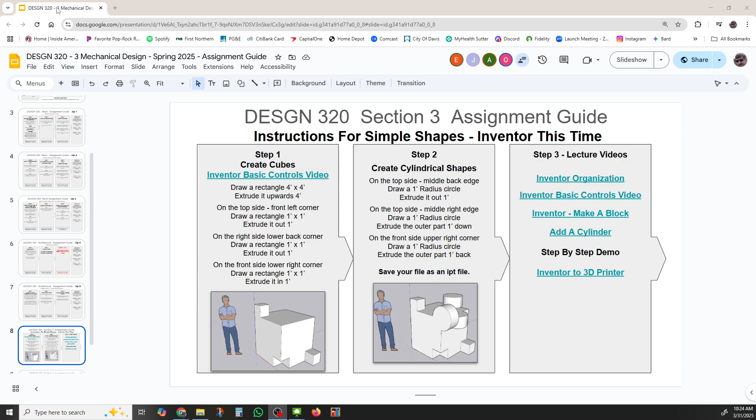Okay, so I'm going to pull that down and out of the way so I can see it and know what to do. And we're going to get going. Remember, we're going to go to a new part, and I've been in it already, so it knows where to go. English US, English, standard part, and I'll create that part.

Okay, and I'm gonna save it right off the bat. File, save, and I'm gonna call this simple shape demo. Simple shape demo. Yours will, you can just call it simple shape with your initials on it.

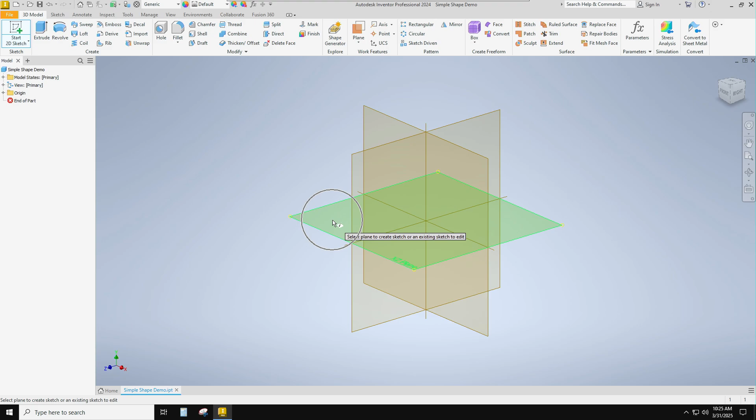Okay, and remember I've got all these things to look at, and I usually like to go to an isometric view when I'm doing solids. So draw a rectangle 4 foot by 4 foot and extrude it upward. So I have to start my 2D sketch. I'm going to put it on the ground, left click, kind of rotate my cube a little bit, and I probably have to zoom out quite a bit.

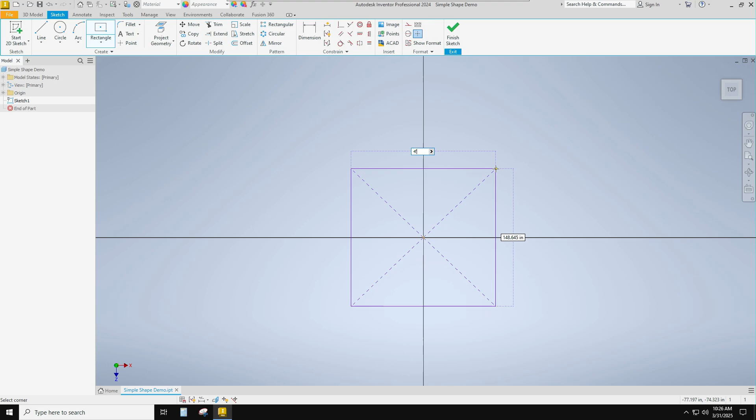Use my little hand there, hit escape, rectangle, find the center, out. And I know that 4 foot, I can type 4 foot with the apostrophe, tab, or 48 inches, 48 inches. Enter. There we go, 4 foot by 4 foot. Remember, green check mark.

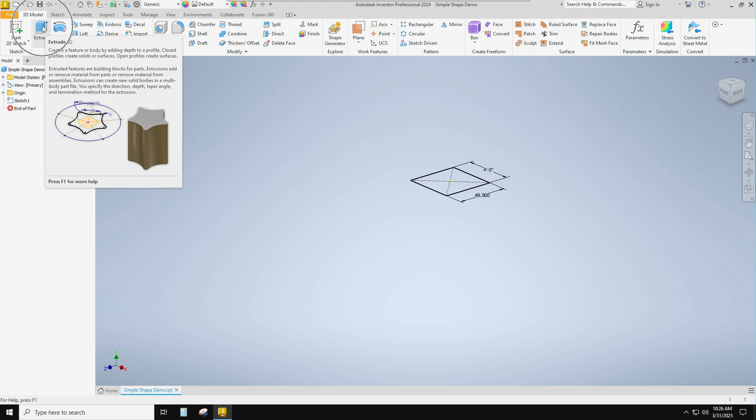Going to scroll out a little bit because I need to extrude that up now. Extrude, left click, find inside of it. Click, and then give it the distance: 48. There we go.

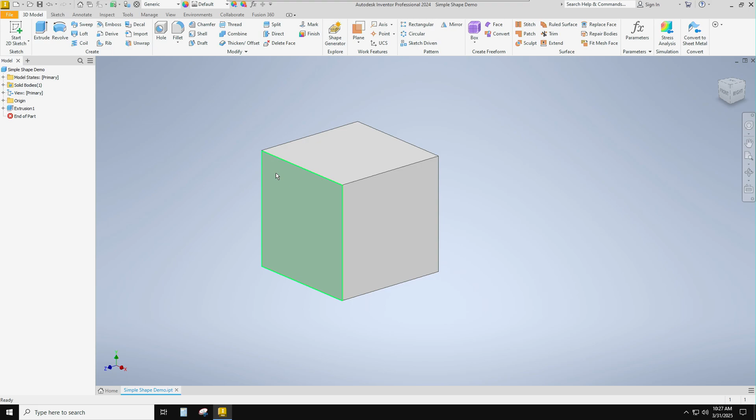I'm going to double click my mouse wheel to zoom extents. Go out a little bit. Okay, on the top side, front left corner, that's going to be right here. Top, front, left corner, 1 foot by 1 foot. So now it's going to go up from here. So I'll start my sketch on this surface, just like SketchUp.

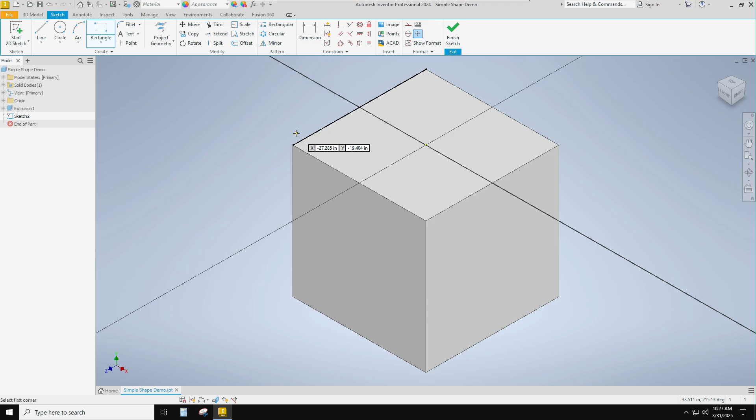And I'm going to get it oriented right. I'm going to go to my front view, get it oriented. It's going to go right there. And this time, of course, I want probably a rectangle that starts in a corner. Click it, turn green, click it, turn green. I'm moving it with my fingers off the mouse, and then click the mouse, left click, let it go, pull it out. My fingers aren't touching it anymore.

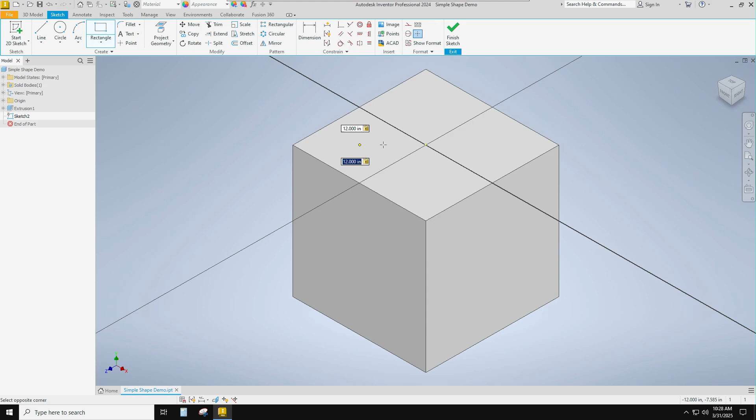And 1 foot, I can type 1 apostrophe for 1 foot, tab, or I can type 12 inches. Okay, so that one's done. Finish the sketch and extrude it upward. This one is 1 foot. Okay, got it.

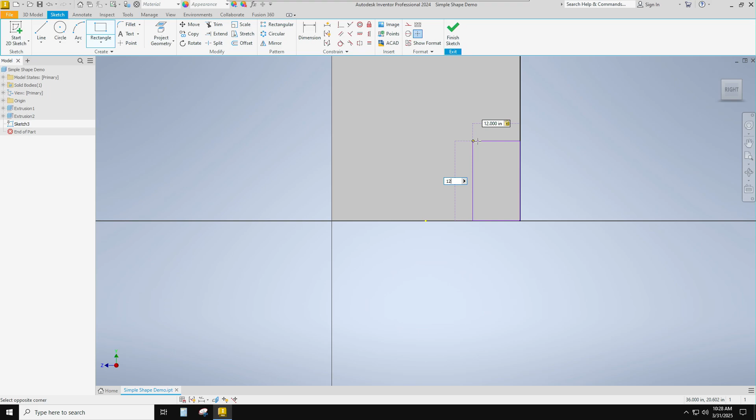Right side lower back corner, it's going to be much the same thing. Start my sketch, left click, find the surface, left click, rectangle, find that corner, it's snapped to it, it's green, left click, 12, tab, 12, enter, finish. Extrude. This is just like SketchUp, 1 foot. And it sort of remembered the last one I did, which is really nice.

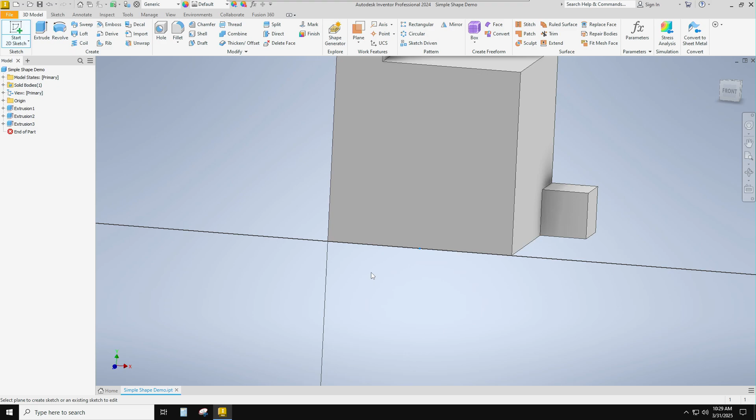And the last one is this front, and I have to push it back this time. So here's my start. Find that front face, make my shape. Again, it's a rectangle, and I can find this corner. It kind of snaps. It's hard to see, but it turns green and kind of pops into place. Left click, 12, tab, 12.

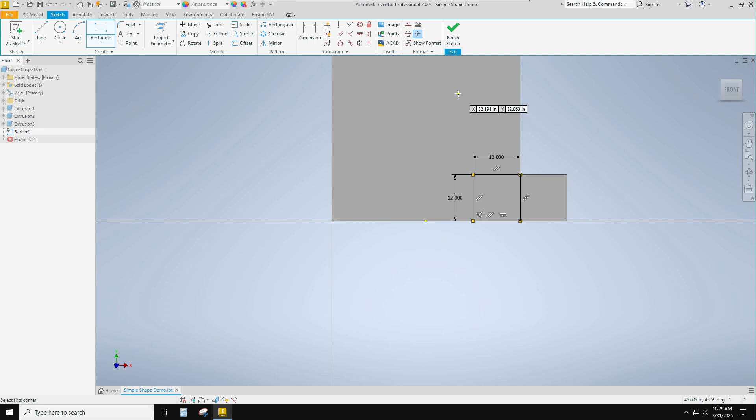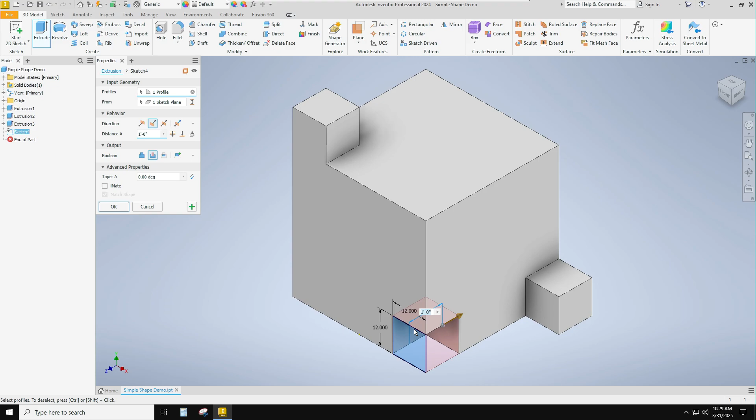12 by 12. Finish. And this one, when I extrude, instead of going outwards, I want it to go inwards. So I have to switch the direction. And it automatically switches to subtract, but I could do all sorts of things with it. Okay, but it's going to subtract my piece.

Okay, so I've just done something good. I better save it. I'm inside. I want to save. Okay, so that's a big cube, a cube on each face, two of them that are positive out, one that is negative in.

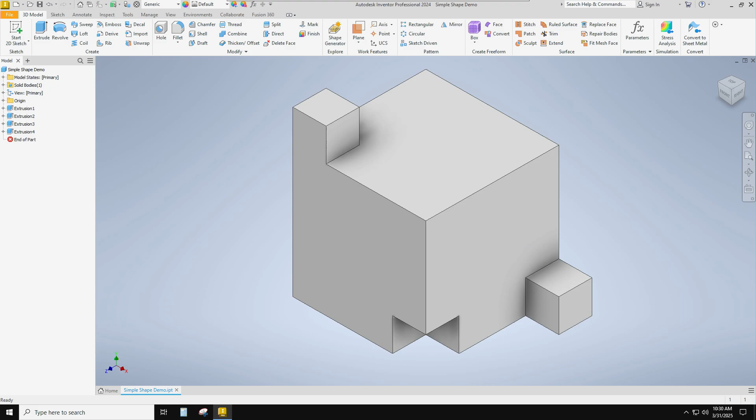So that's step one. Now I'm going to put the cylindrical shapes on it. Top, side, middle, back. Okay, so here we go again. I'm going to start my sketch on the top. This is my middle back. Circle, find, there it is. It found it, it snapped to it.

Bink. Left click. And it's doing the diameter. And this wants a 1-inch radius, 1 foot radius. So my diameter has to be 2 feet. Enter. Cool.

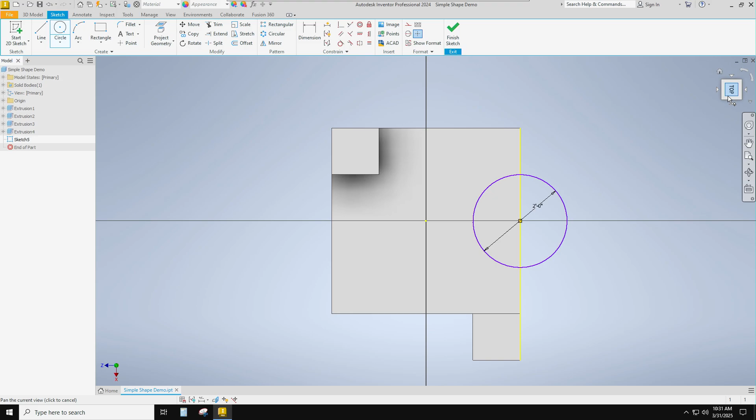Finish my sketch. And now look, this is really cool. I can pick both halves, but I just need this outside half. No, I need both halves. Click, click, and go up 1 foot. So I clicked in each one to go up.

Okay, my next one, top middle edge. And look, every one of these, I can see each one that I've done, and I can adjust them individually if I need to, which is a really cool thing. I can take each of those as sort of like a feature, kind of a solid shape that's put together into each of these. I can adjust each of those separately.

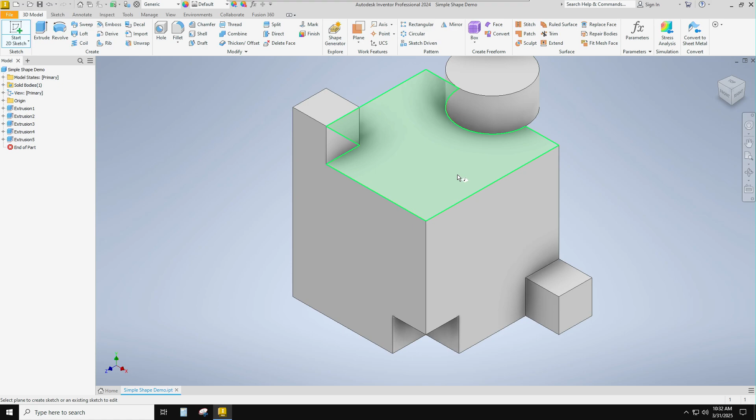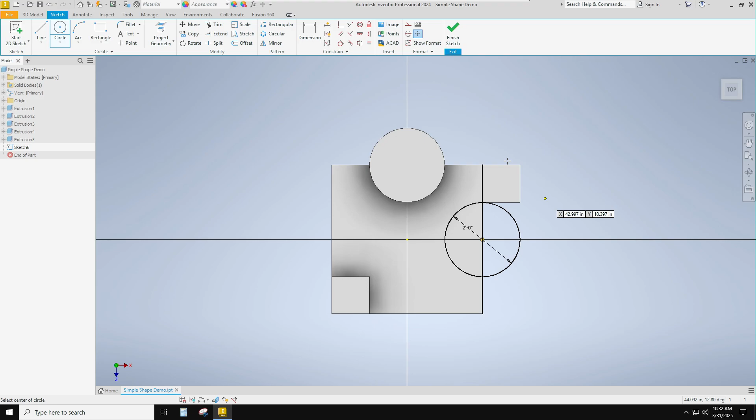But now I'm going to do another one on the top side, middle right. That's right over here. Top, right, middle. Find that midpoint, it snaps to it. And remember, a radius of 1 foot is a diameter of 2 feet. Finish your sketch. Now this time I only need to click this outer part and change the direction.

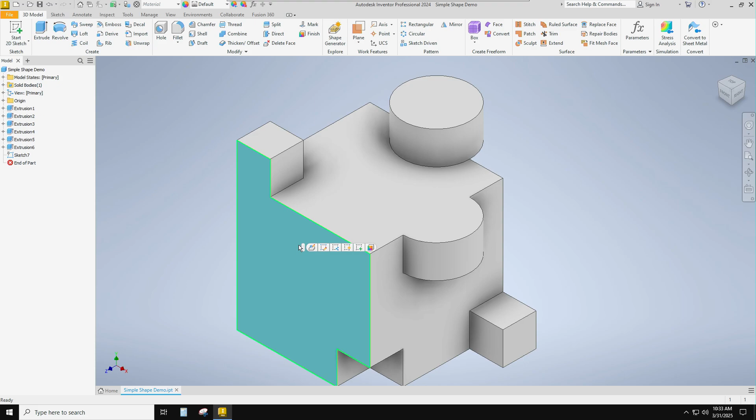Okay, and my last one is on the front. Let's do that one again. Move it down where I can see it. Actually, I think I want to see it from there. And I got to find that middle. There's the middle, right there. 2 feet. Enter.

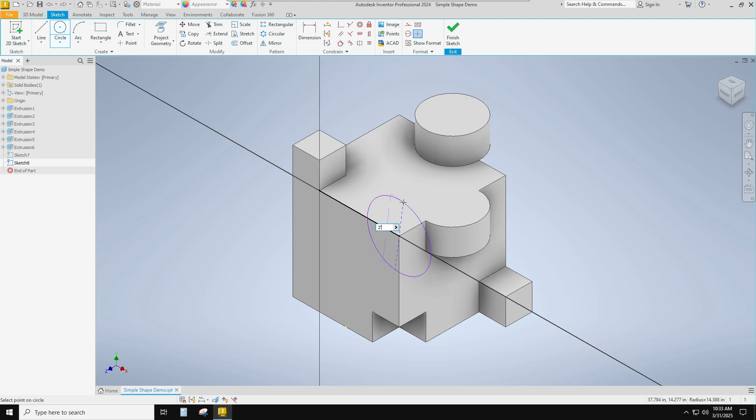And this one, oh no, that's not where it goes. Sorry, it goes on this corner. 2 feet. Enter. OK, and press pull back the other way.

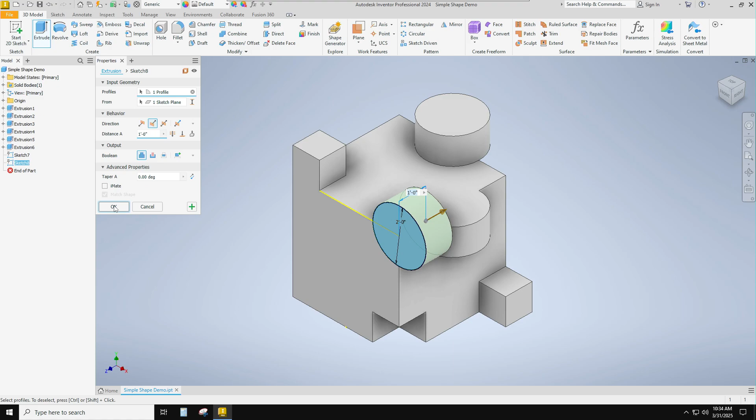And now look, I have to tell it that I want that to be a full part. I want it to be a full real part, not a cutaway. There we go. And that's my part. I can see it from all over. Looking good. Save. That's the part we want to submit.

There's your step-by-step demo of the simple shape in Inventor.